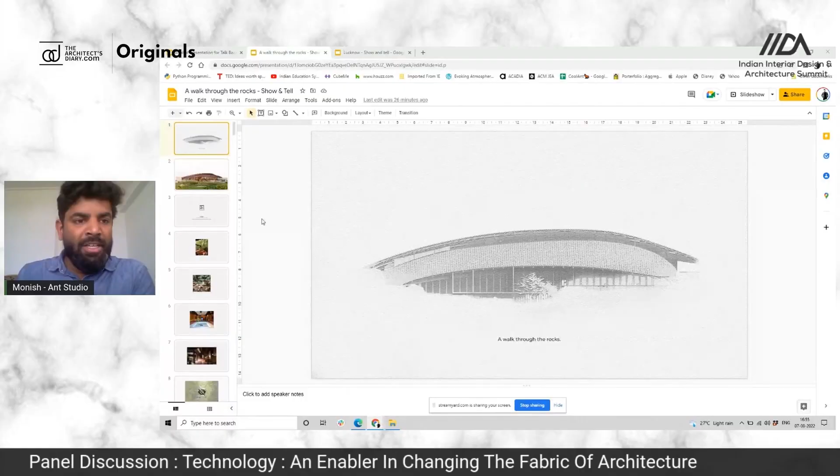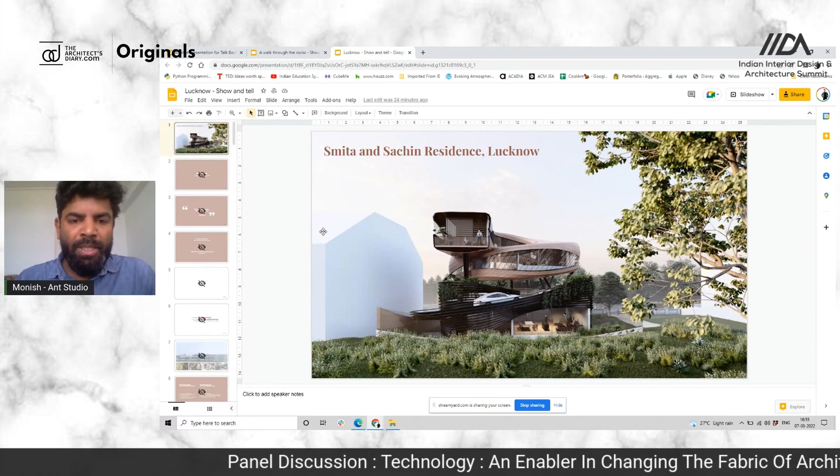So today I'll be talking about two projects. I think the brief in here is about nostalgia. The client wanted something absolutely stunning and modern, but at the same time very nostalgic in approach. The other one is the extreme opposite. Both are presented in an Indian context, but the other one is futuristic, where the client's brief was based on his aero manufacturing background, and he wanted a building to represent what he does, with access to all these advanced tools at his disposal, so he wanted something very futuristic.

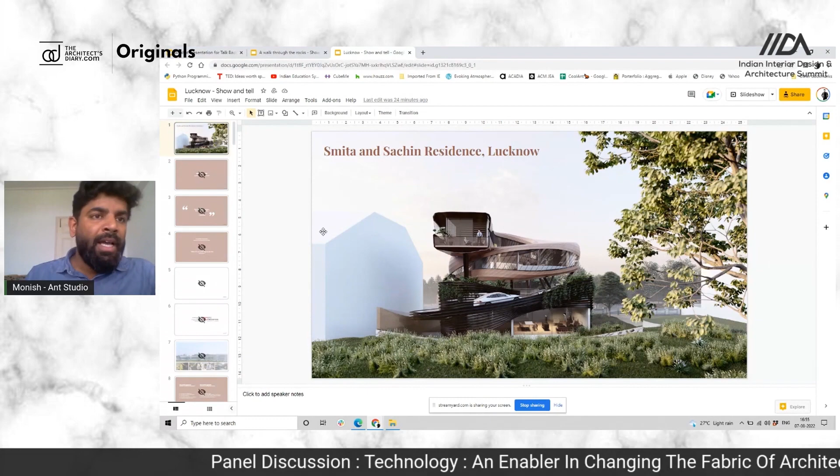So, yes, is my slide visible? All right, I'm assuming yes.

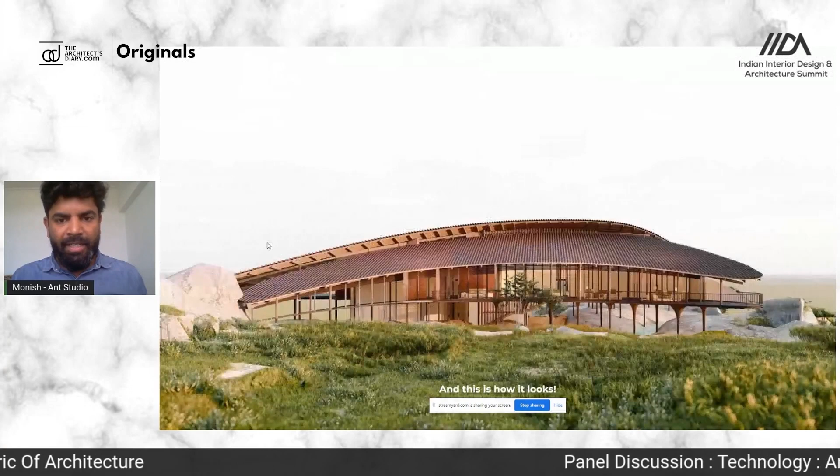So nostalgia, like I said, is what we were trying to solve with the first project. When we represented these images to the client, he said he wanted his building to be nostalgic. This is what really comes to mind when we talk about Indian context — traditional courtyard spaces with beautiful terracotta roofs, verandas and wood, especially if you look at the material, and all the natural materials you find in Indian buildings and spaces. So this is what we wanted when we put all of these together. The whole idea is that the building should represent this, so he can go back in time and relive the moments. One of the most interesting things he mentioned is that he wanted his grandchildren to learn about the past — that was something truly wonderful to hear from the client.

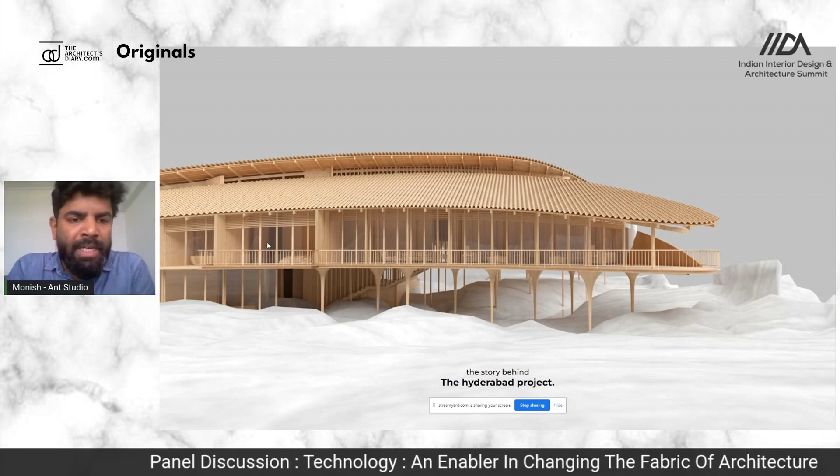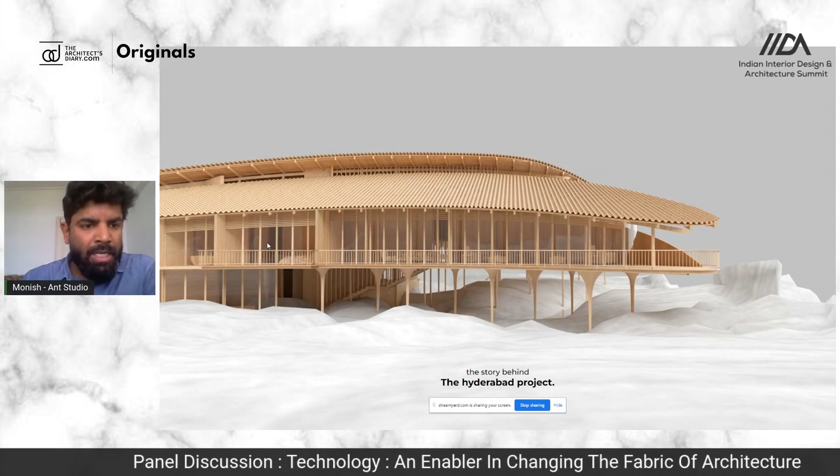So we came up with this form that is absolutely fluid and parametric, which would have been very time-consuming without the help of technology. But if you notice below, there's this undulating rock at the bottom. So when we speak about technology here, I want to talk about how it's not just about the building and the form, but also about understanding the ecology of the material and the site, and how technology can help us learn more about the surrounding environment and landscape.

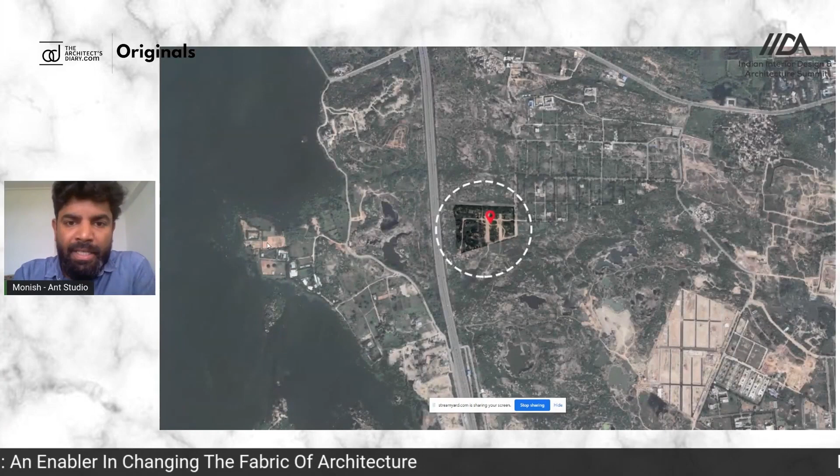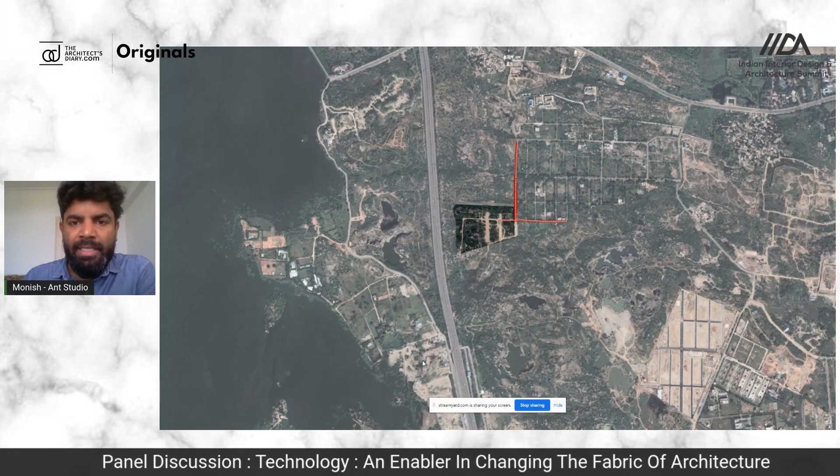So the site location is here in Hyderabad. If you notice, there's a beautiful site on the left-hand side with a lake. This is a main road providing access. I won't delve too much into the site, but these are some proposed projects at different plots, with a five-star hotel coming right below this.

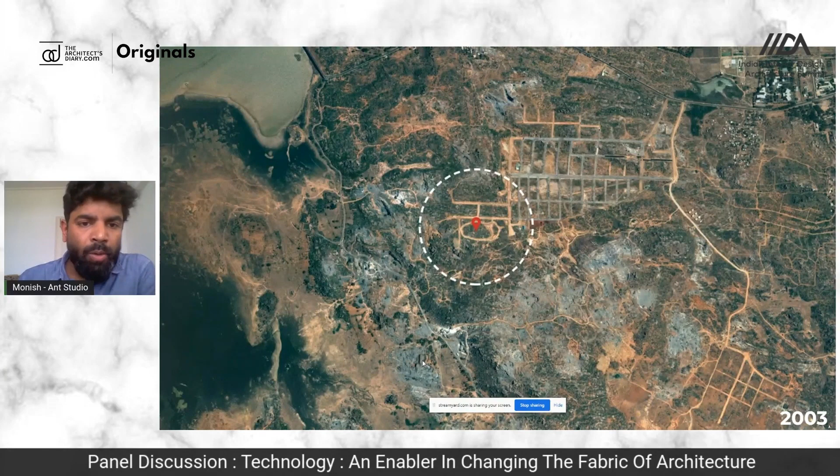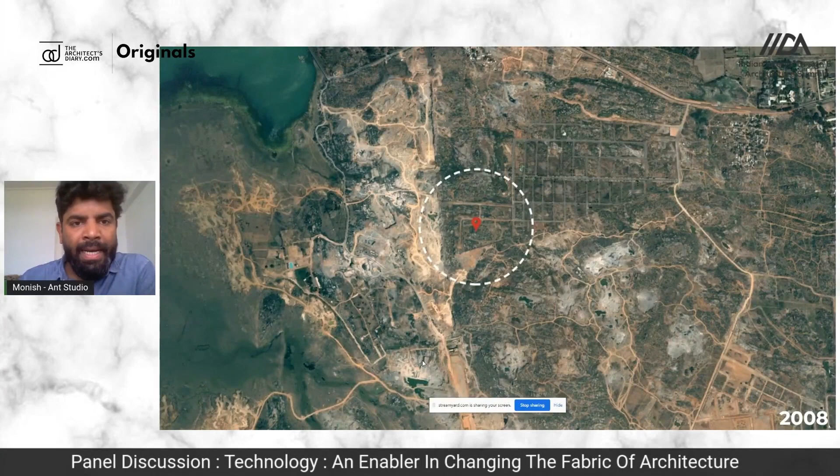This is the site, but it wasn't always like this. When we looked at how the site evolved over time, the lake was actually much further back — the lake line was way beyond where it is now. This is approximately 20 years back, around 2003, showing what the site looked like. Then they started building this road and access to connect the highway from the airport to Gachibowli, and you can see the change in the landscape.

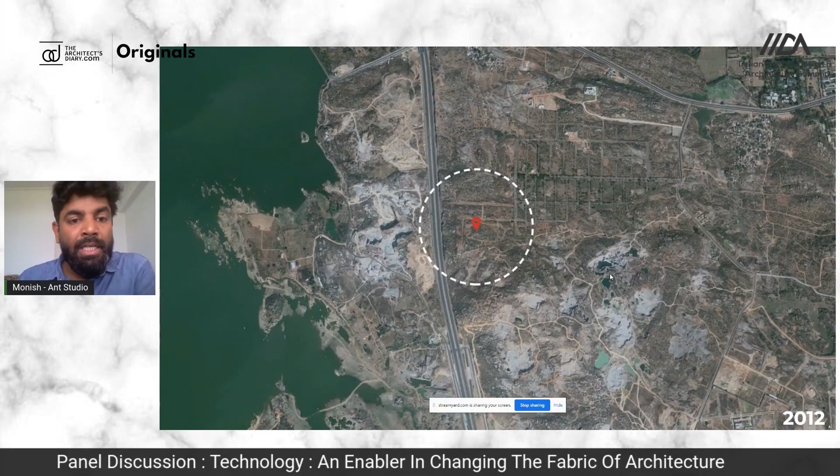Surprisingly, the lake started growing — you can start identifying these beautiful patches of lake and water forming, which is a very positive sign for the site. This is what it looked like just 2 years back — you can see a lot of green, and the lake footprint has actually increased.

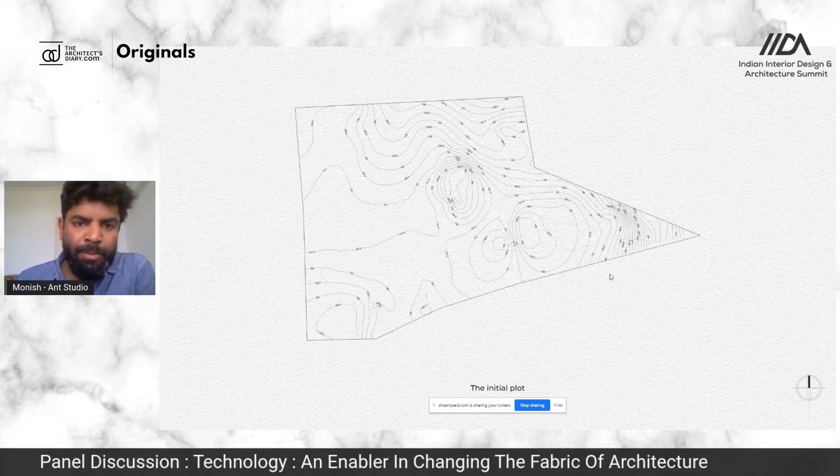So this is the rocky site, and one amazing thing about it is that when you stand on the edge, you don't see the highway — it disappears. I'll show you the footprint.

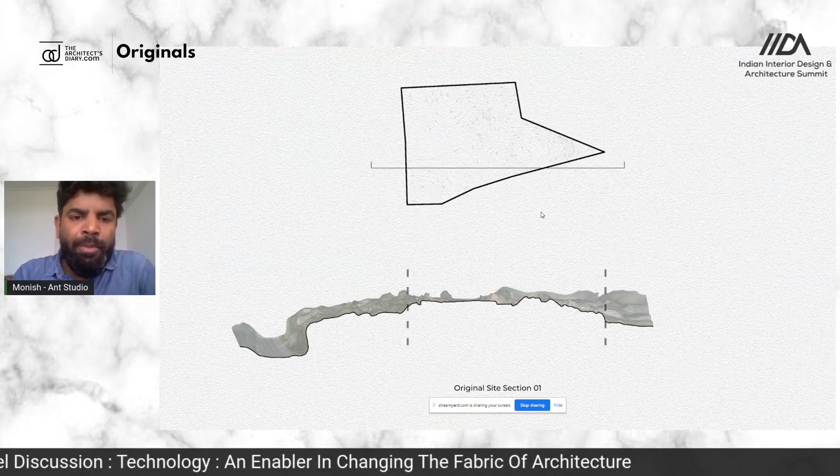So when we started, even before we made a sketch or any design on paper, right after my first visit to the site, I told the client that I think there is so much more than meets the eye. I requested the client to scoop out the complete land and unearth these rocks so that we can know what is below.

So the whole idea is rather than going upwards in the building, what if we first understand what is below? We got the site entirely cleaned up, exposing the rocks that are out there, so I could see if we can use these rocks as part of the landscape inside the building. We documented the rocks using drones.

And we have these little boulders that are actually scooped out to make the road. So the whole idea is also how we can use this material for the construction eventually.

Yeah, so this is what - I think I'll go forward. Like I said, this is where the site is sitting with these tall boulders. I'll just jump into the design.

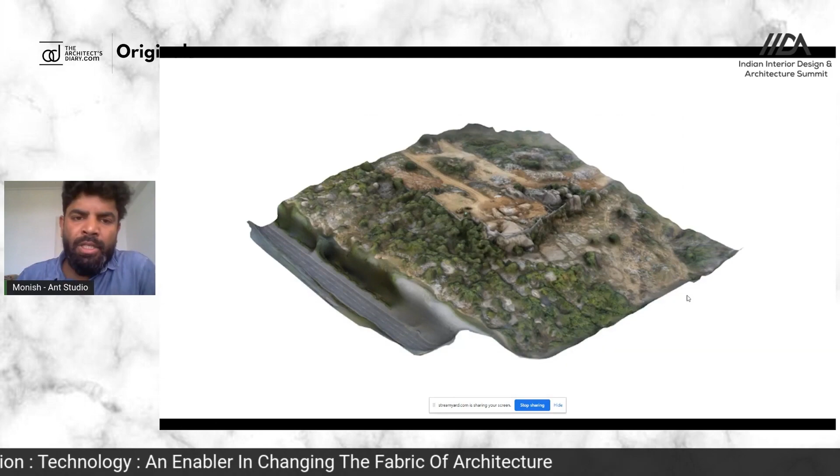When we started, I think this is where things got really interesting, because for such a spectacular site, what was really important for us is to understand it. So for us to actually make justice to the rocks, we did a 3D scanning for the first time - photogrammetry to take what is physical into a digital medium, so we can carefully carve out around the rock without tampering with the ecology.

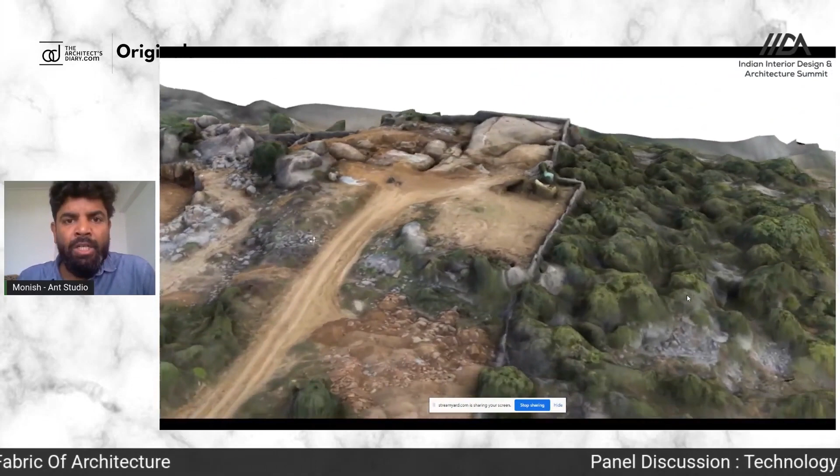So the whole idea is that, even before we started with the design process, we started with scanning it so that we can get the precise coordinates of each and every rock. Because when we presented this idea to the client, we said let's not do anything to the rocks at all and try to protect them as much as we can.

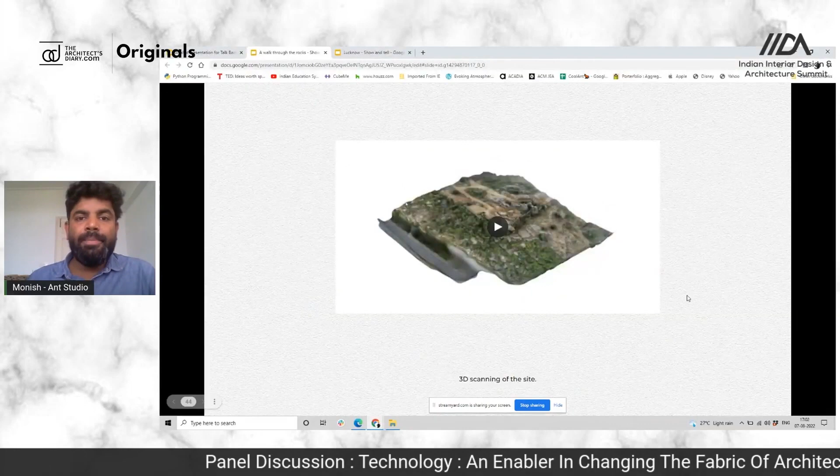Unfortunately, if you guys are familiar with the landscape of Hyderabad, this is a very common sight - everywhere what is happening is people either cut the rocks or actually build on top of it without really giving importance to the rocks that are below.

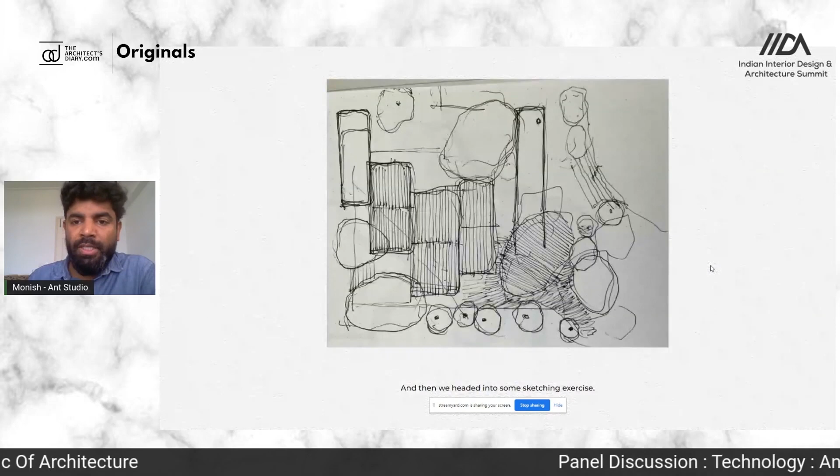So these are some of the initial explorations to build around the rocks, and finally we landed on this, where we said okay, there are these two beautiful rocks on the site, and what if we design a building like a split in between? And then this is what we came up with.

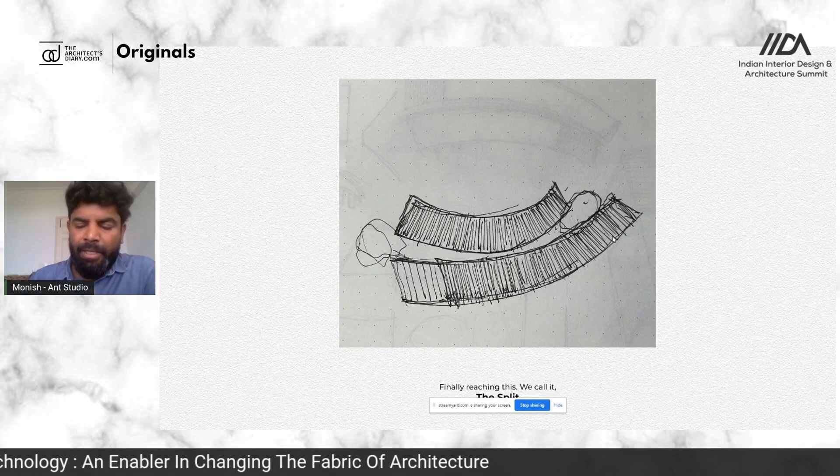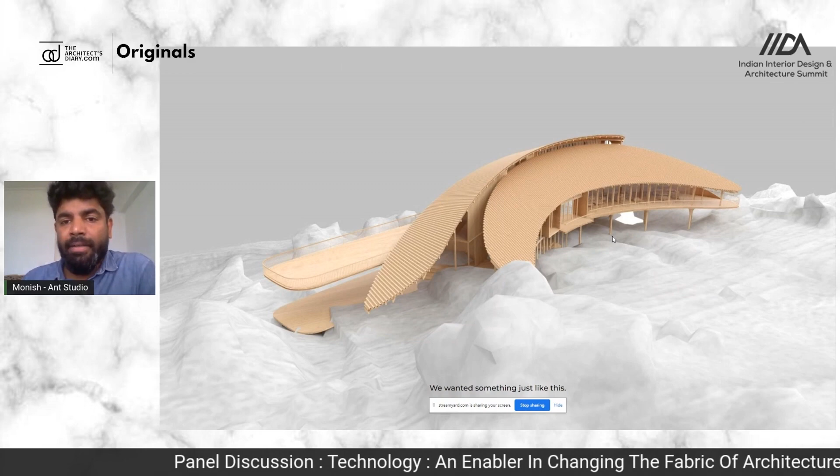Like I said right at the beginning of the presentation, the whole idea is what the client really wanted - a traditional building, when it comes to the material and the feel, the look and feel of it, and at the same time to have something that is really contemporary in approach.

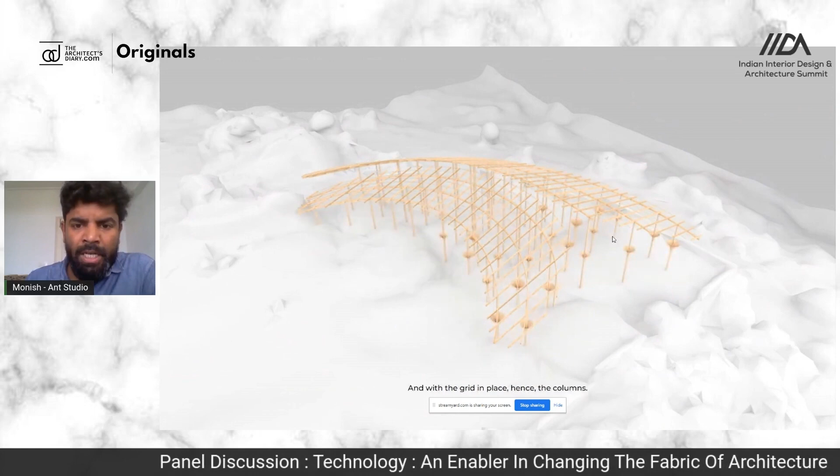So taking clues from all the traditional Indian architecture and the materials, with the purlins and the rafters, he wanted a lot of wood in the construction. So we went about designing these mushroom columns that will be visible from the landscape on the ground floor.

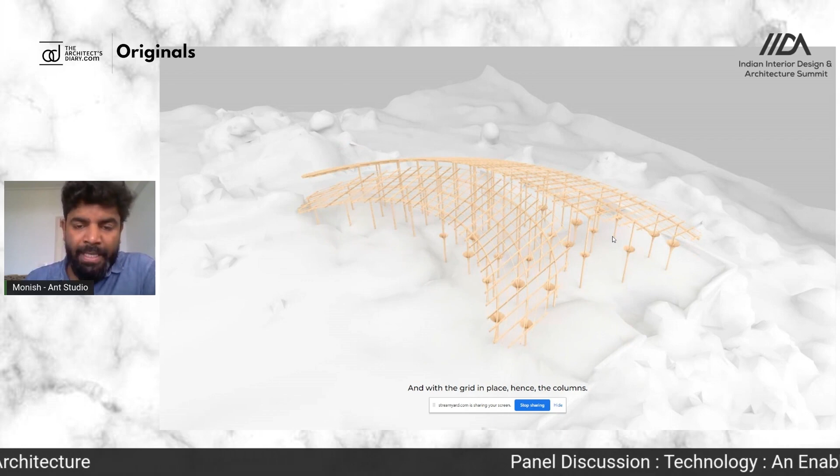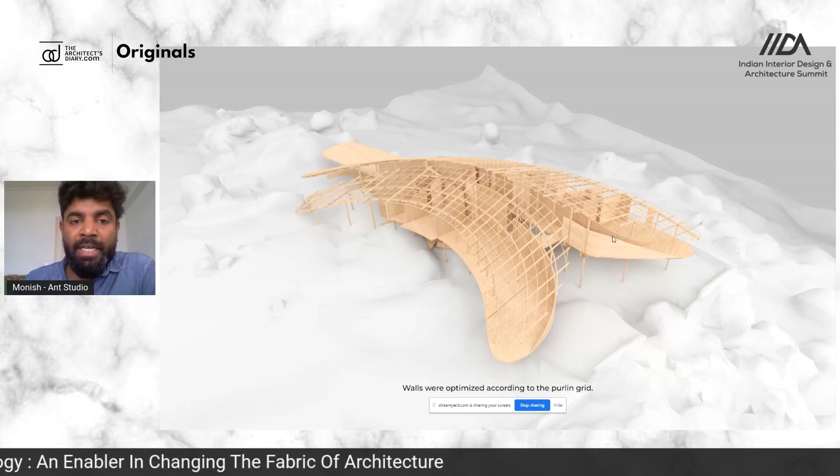Which we kind of made like an open rock landscape in the living room. It's like an open landscape on the ground floor, and we went about designing the building using slopes that can actually use this traditional kavelu, what we call the country tiles, for the construction.

And right on the top, there is a split in the building which can allow the light to come in and penetrate in between. And finally, we have this roof that sits on top of this.

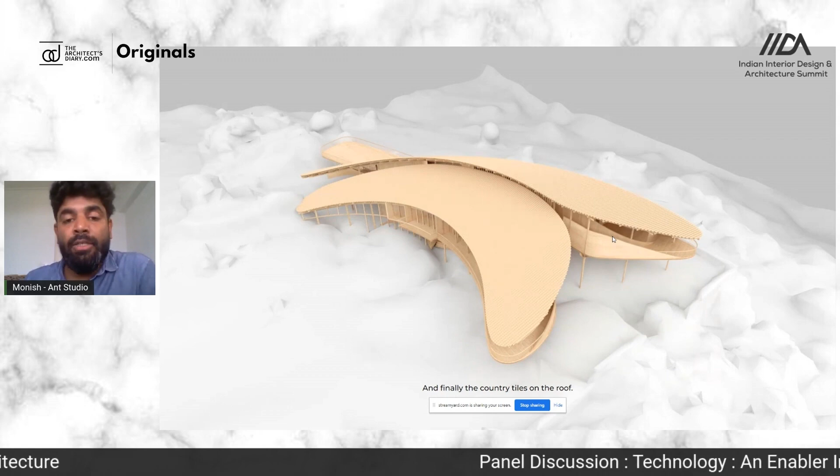So there's a lot of optimization that we have done to arrive here, so that the entire curvature of the roof can actually fit the traditional tiles that we use on top of this form. So that was really important for the feasibility of the project.

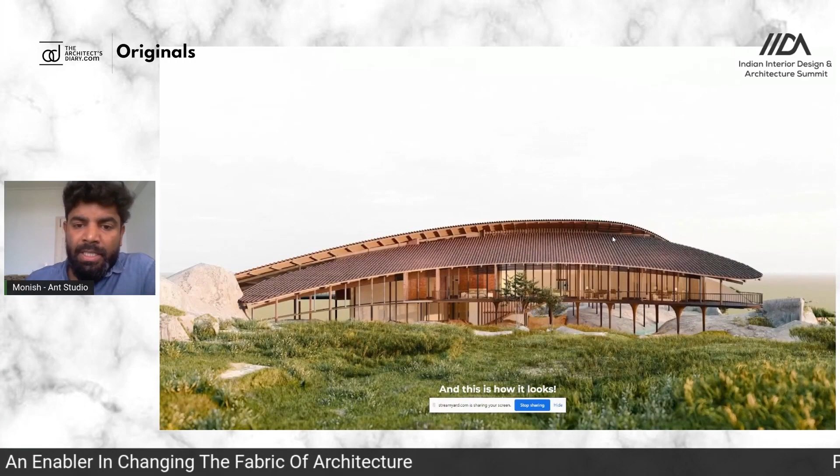So this is what you finally see, which is the whole building elevated. With this, I will not get too much into the planning part of it, but more into this.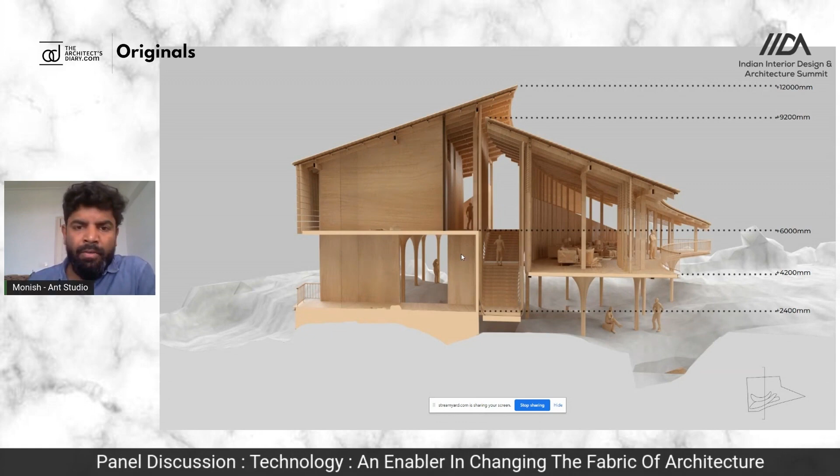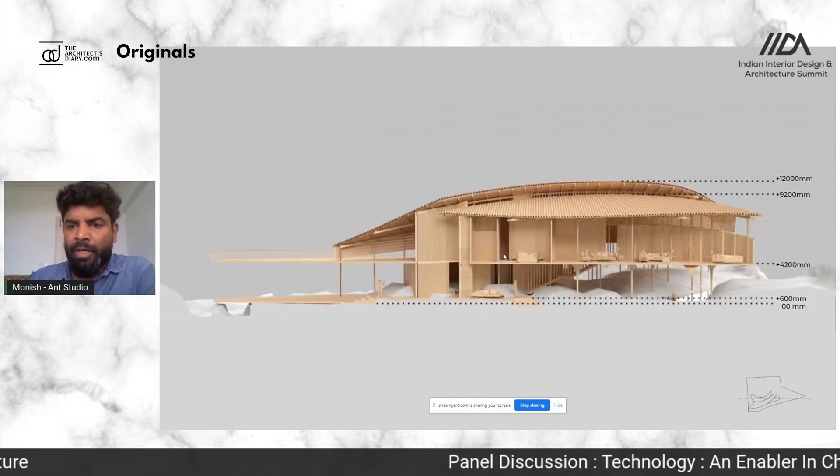So there is this split level with a staircase. We have divided the building at two different levels so that there is this narrative that follows at a mid level as we walk in, and also the building kind of opens up, so the entire living area in the front gets the view of the landscape.

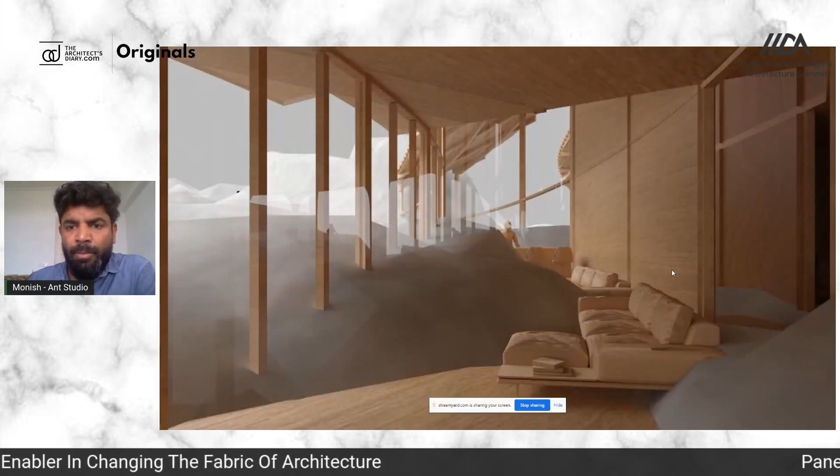This is the ground floor living room, bringing the rocks as is into the living spaces so that we don't have to cut them. These are some of the living spaces on the ground floor. Whatever recesses we created, we wanted to channelize and collect rainwater using this natural slope.

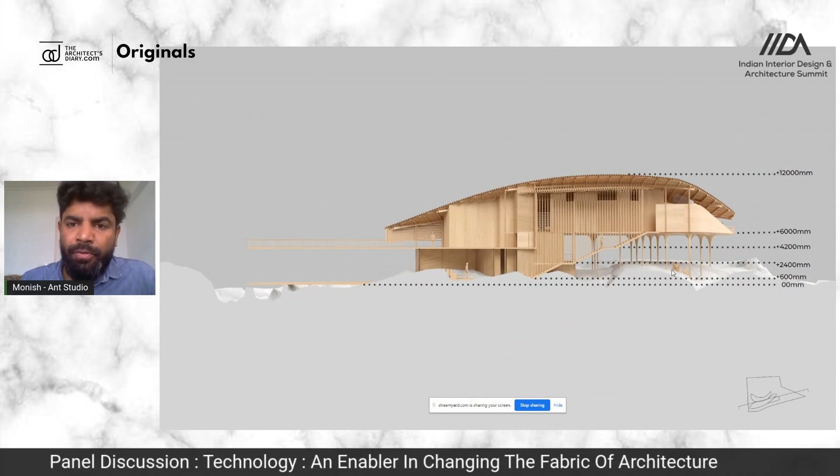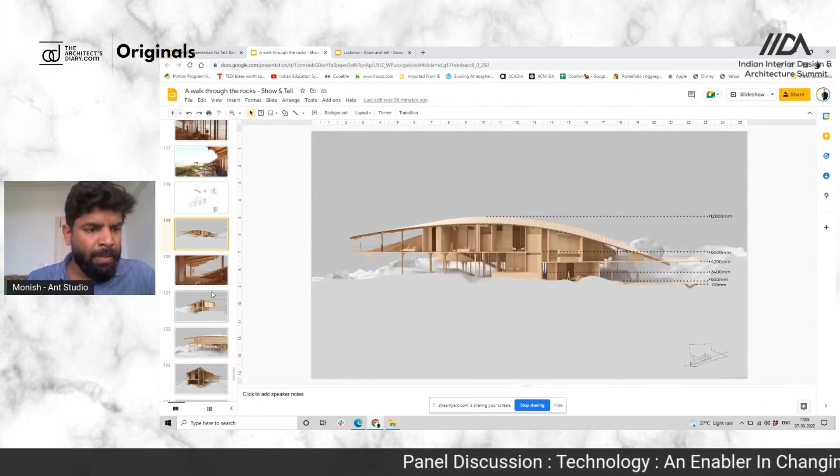So that we can create a natural water reservoir for irrigation on the landscape in the building. This was the first project, where we wanted to capture the nostalgia of traditional spaces, but at the same time use computational tools to arrive at that end. Finally, this is what the building looks like, sitting on the boulders, as if it's coming out, opening to the lake in the front.

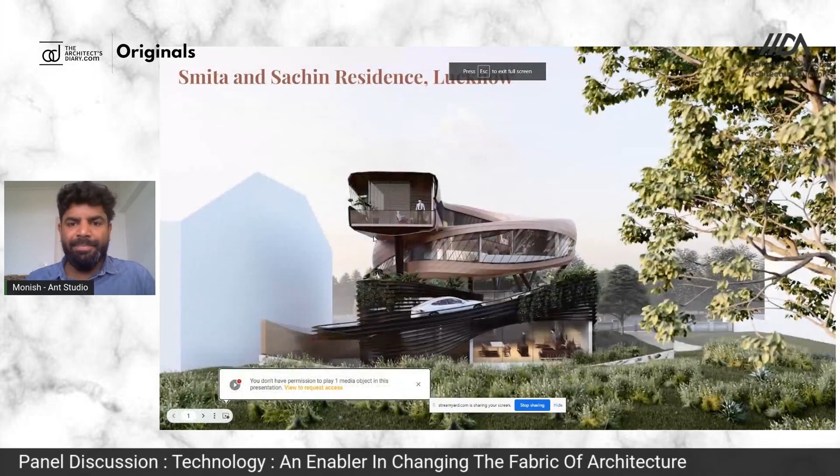If there's anything about the planning, I can take it in the questions. I'll quickly move to the second project, which is a roller coaster, both in form and also in the process so far. It was kind of a different kind of experience to present.

So in here, the site faces the golf course, and what you see is actually a view taken from the golf course, behind the project. The client's brief is that he wanted the parking or drop-off to be on the first floor, so you actually climb up like a ramp that goes in, and there is this landscape.

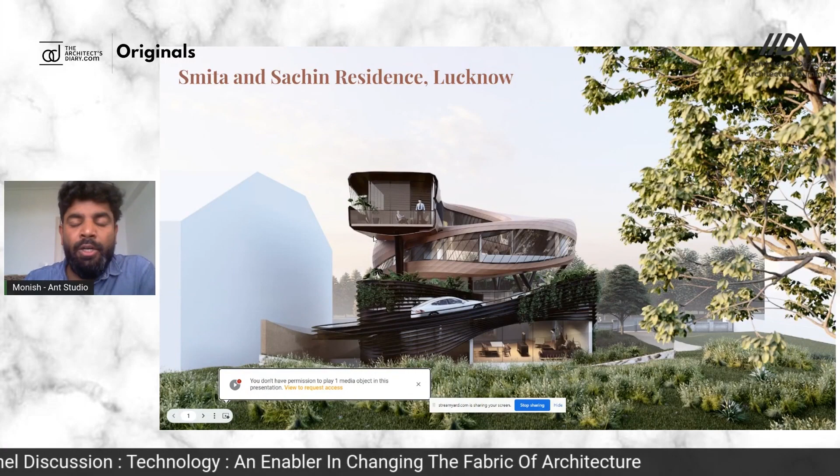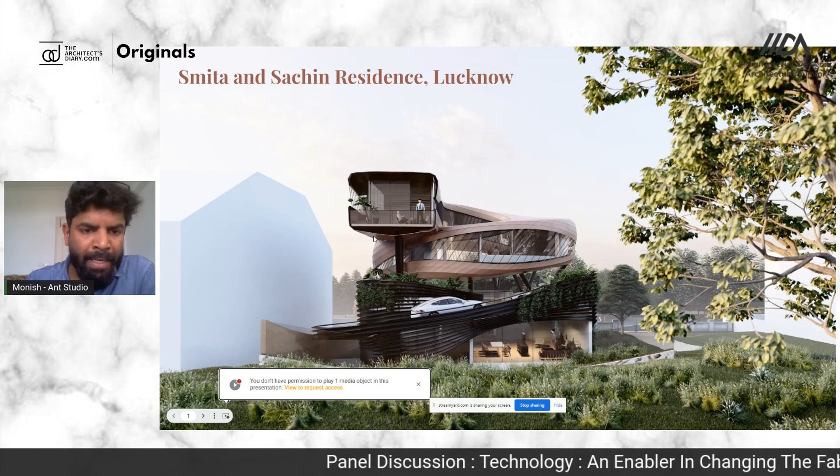So there is this form that is kind of free-flowing. One very interesting thing in this building is that all the spaces are actually fluidic, including the floor plates, not just the form. There's a lot of fluidity in the floors as well. Of course, there are flat areas for furniture, but a lot of circulation is carved out so one can freely move from one space to another, like walkable surfaces. I'll go more into that at a later stage.

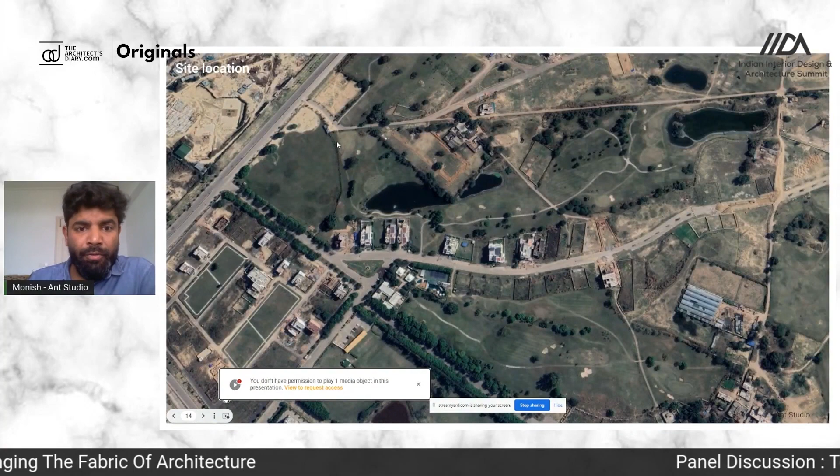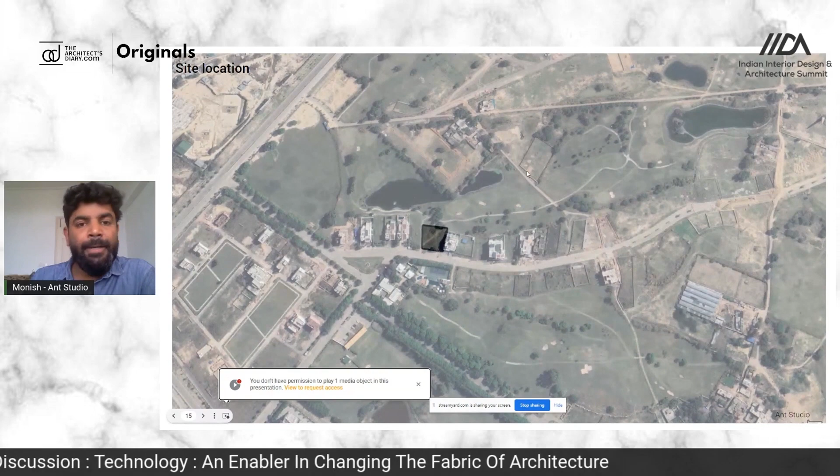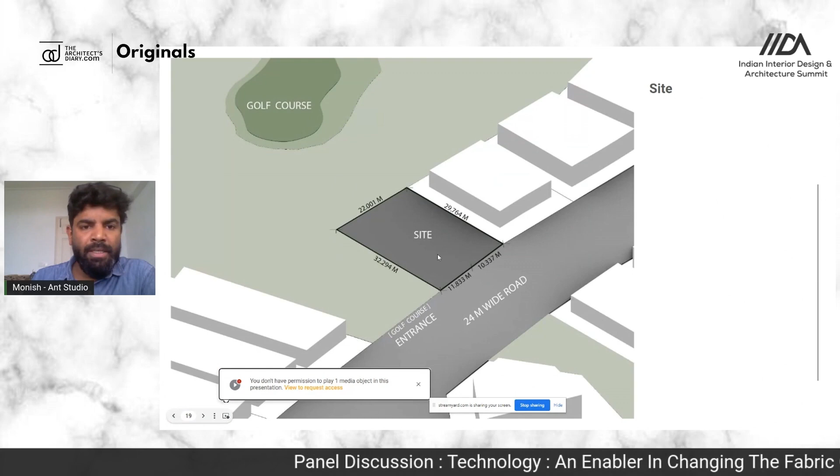This is the beautiful view one gets from where the project sits, and this is a three-side open site facing the golf course, with a water body and all that. The idea is how we can get the maximum experience from all the rooms, so the client can draw experience from multiple areas. So this is the site.

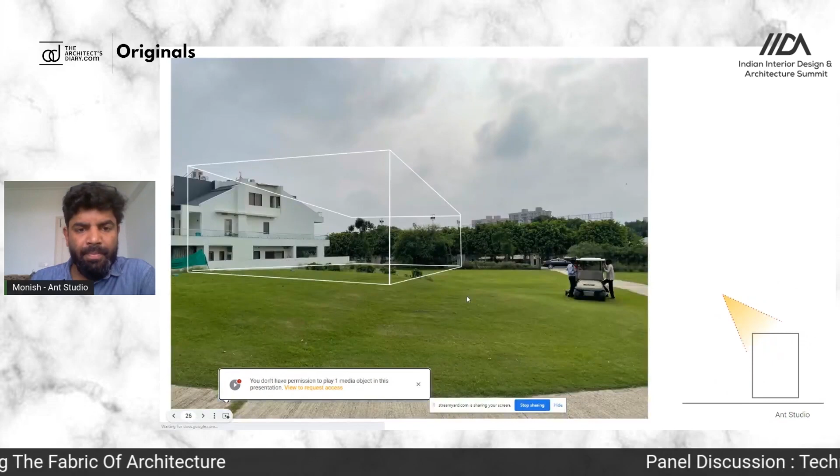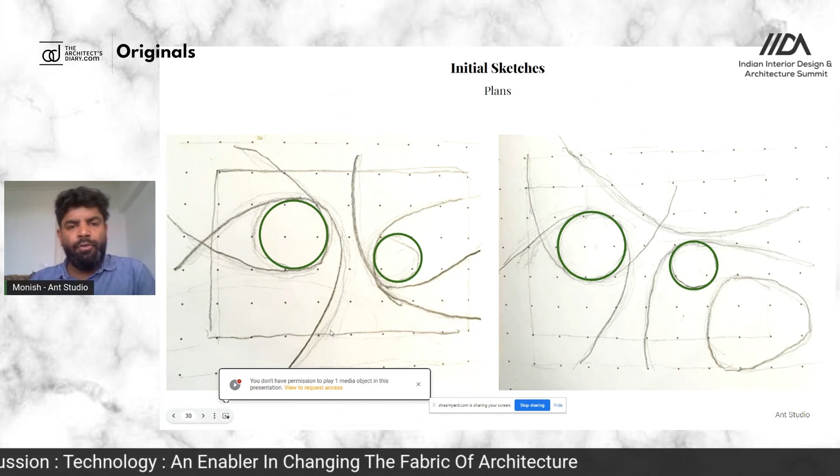I will not linger too much on the images. When we started the first design process, we wanted to draw spaces where each and every space can turn in a fluidic manner, and how we can connect them from one space to another. These were some of the initial explorations and sketches of how we can connect these spaces.

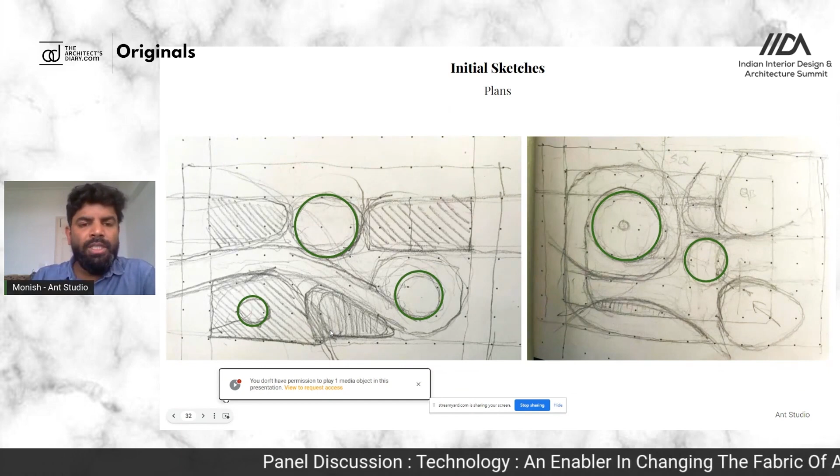What you see, these circles, are basically courtyards. We wanted these lingering courtyards in between, and wanted to connect them so that between spaces there are these beautiful open courts coming inside the building. And these are initial facade explorations of what we wanted the building to look like.

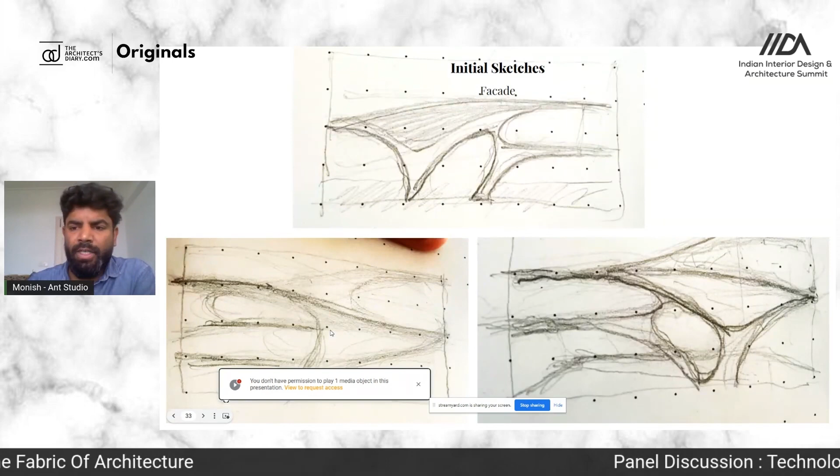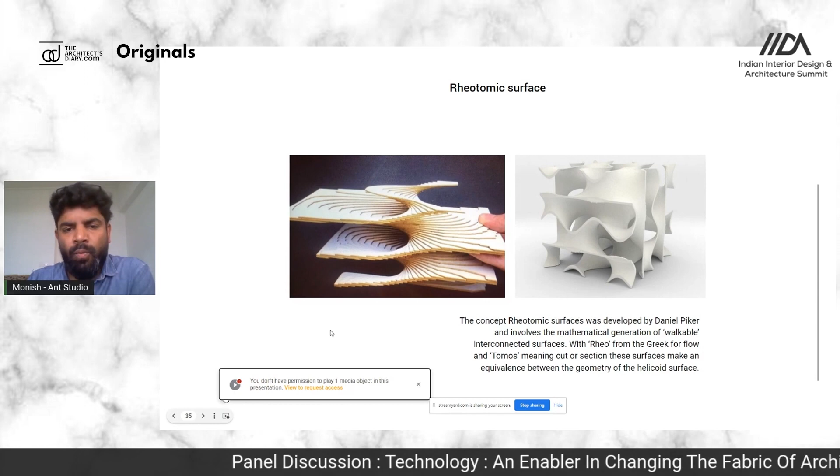We definitely explored a lot about the rheotomic surfaces, because we wanted the spaces to be as fluidic as possible, but finally we went about it without actually using the rheotomic surfaces, just the essence of it, in which the floor spaces can be walkable from one end to another.

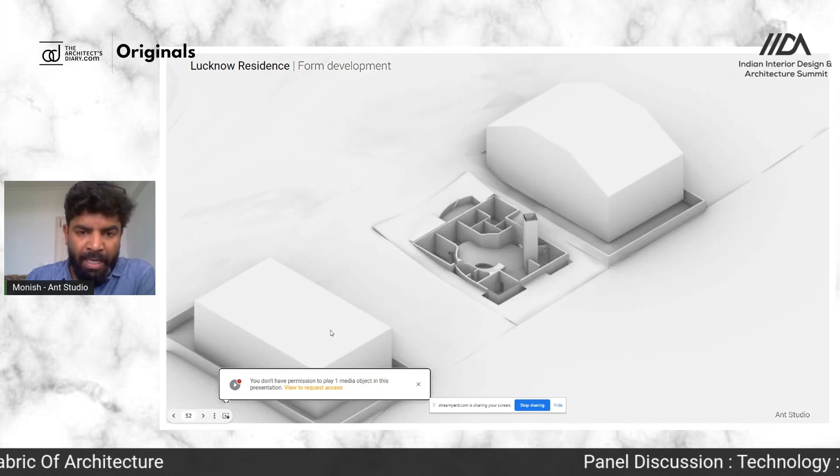So this is the final design. We have this anchor in the middle, which becomes like a home theater, and there's a ramp that runs on top to the lower basement. Then there's an entire central space, which is the entry when somebody enters the project, and you see a beautiful drape on the facade, as if you lifted these louvers, and the entry is formed inside that, like entering a curtain that lifted up, with these beautiful rocks in this corner.

Another challenge we found on the site is that this site is lower than the golf course site.

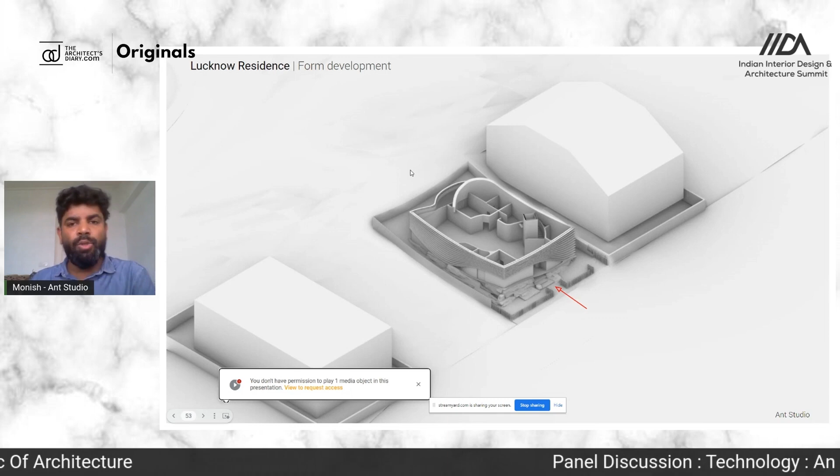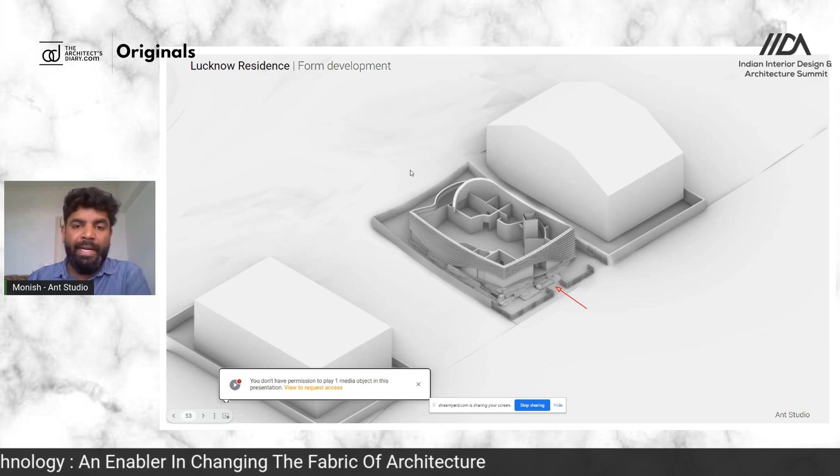The whole building follows this curvature so that as a person walks into the space, he starts climbing the smooth ramp to arrive at the living spaces. As you can see, there's a ramp from behind that climbs to the first floor to reach the parking and drop off.

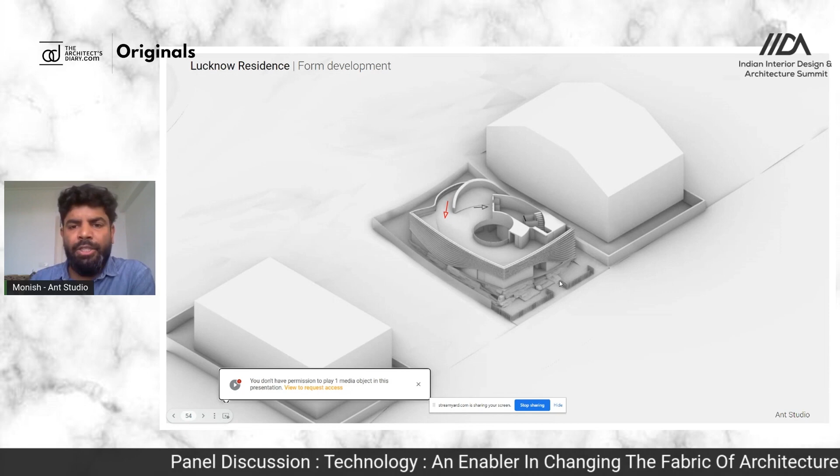There are actually two entries: a pedestrian entry on the ground floor, but the main entry with the parking and everything is on the first floor. And we have column supports for the structure.

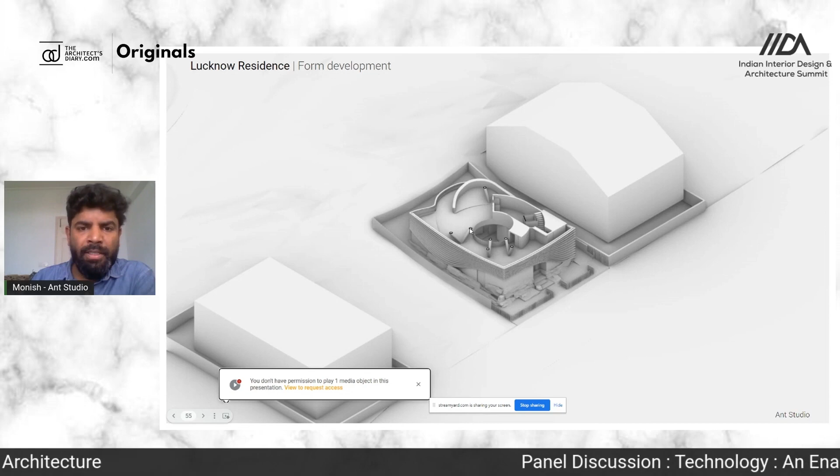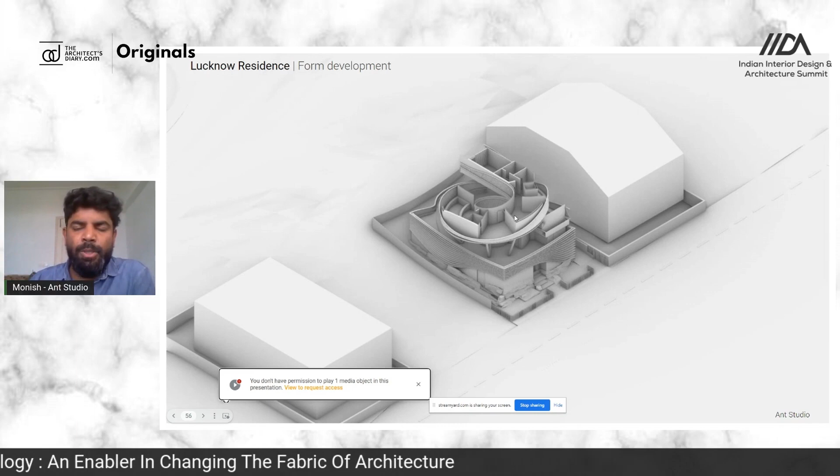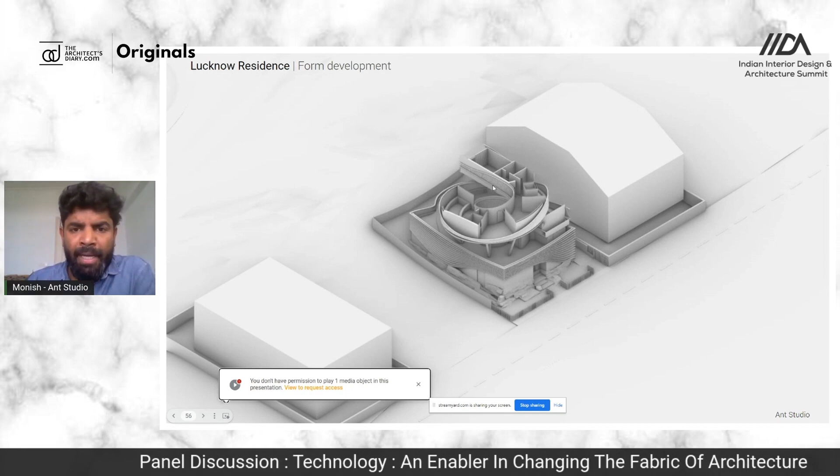This is where the whole floor space gets really interesting, because the floor also starts to become curvy. It was quite a challenge to make sure the functions are accessible, with the pool and different spaces stepping up, while not compromising on the functionality of the spaces.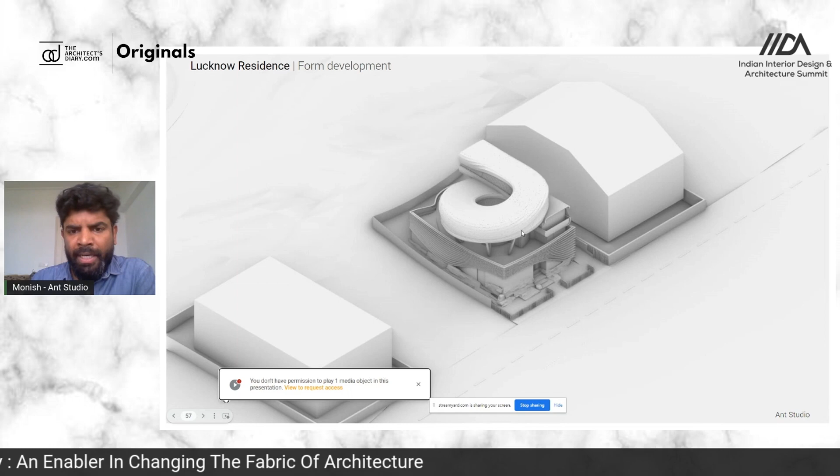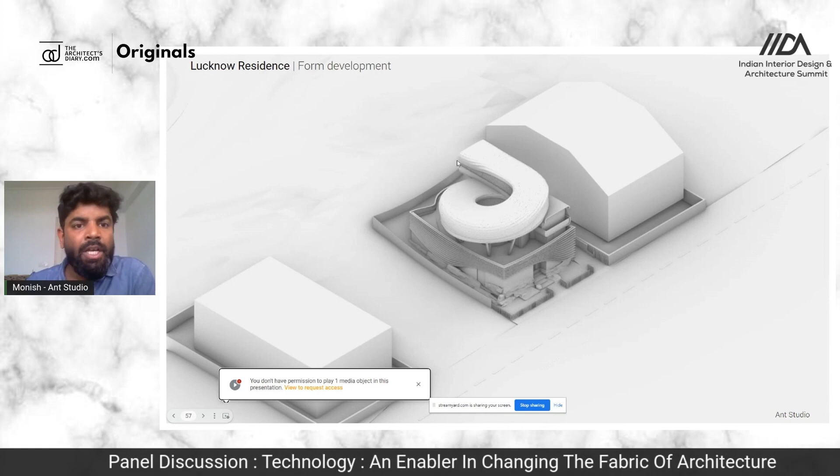So this is finally what we have. This area in the middle is the curvy part, but when you enter, this is what keeps moving and shuffling between the spaces. There's also a courtyard that runs all the way from the top to the basement, to the second basement.

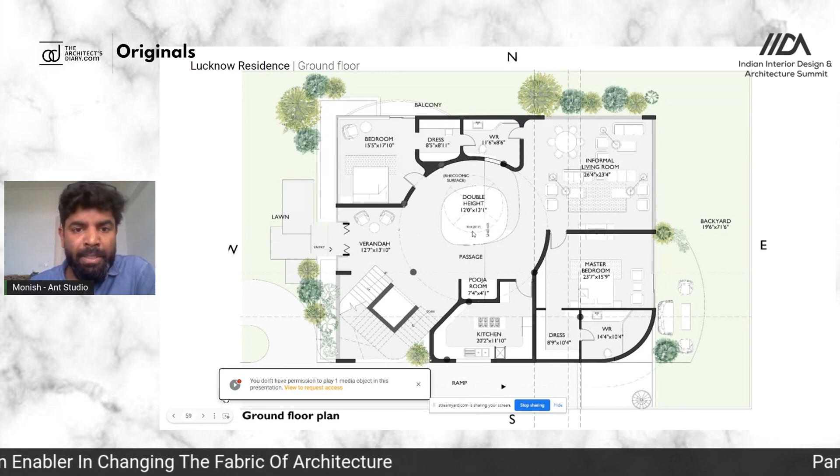This cutout draws light all the way from the spiraling form on top down to the second basement, which has a home theater, and the informal area opens towards the golf course and so on.

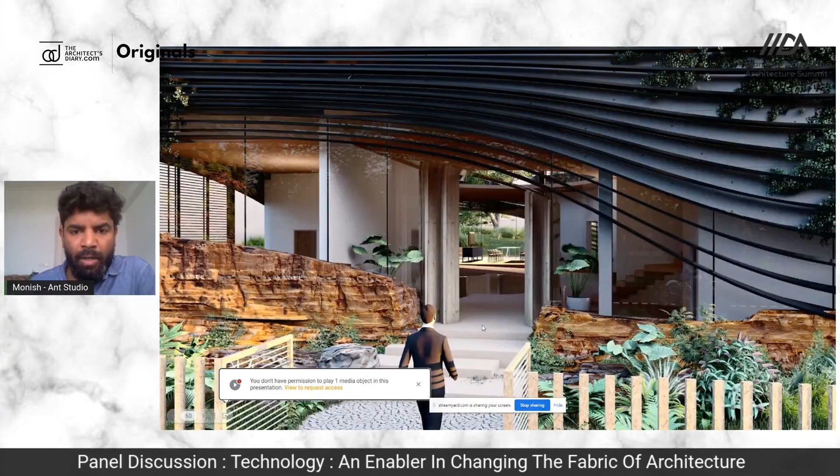So this is how the entrance is. As you can see, right when you enter, the idea is that someone can straight away get the view of the golf course on the backside. You can see that right here.

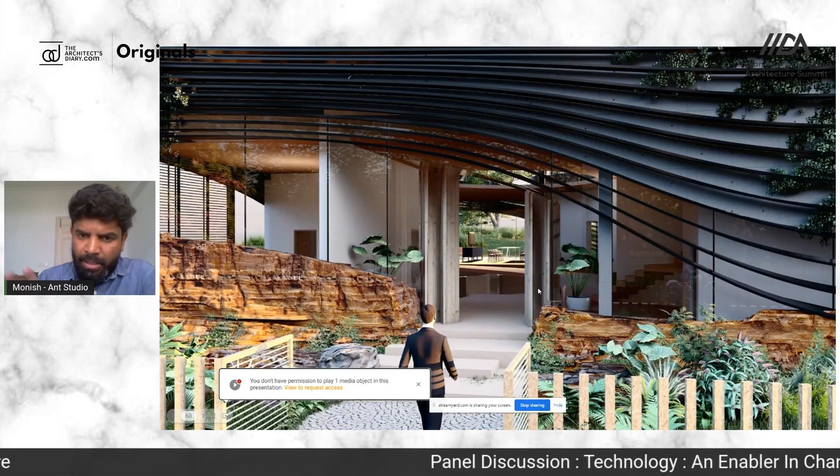When you enter, you see this form slowly climbing up, but the experience is that one can get the view all the way to the golf course.

There's a section through the building. You enter on the ground floor. There is the spiraling thing that goes down, and the skylight goes all the way to the home theater on the second basement.

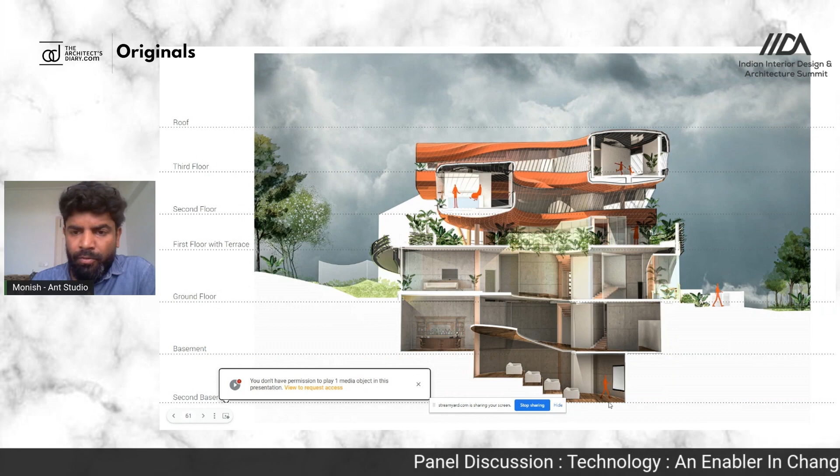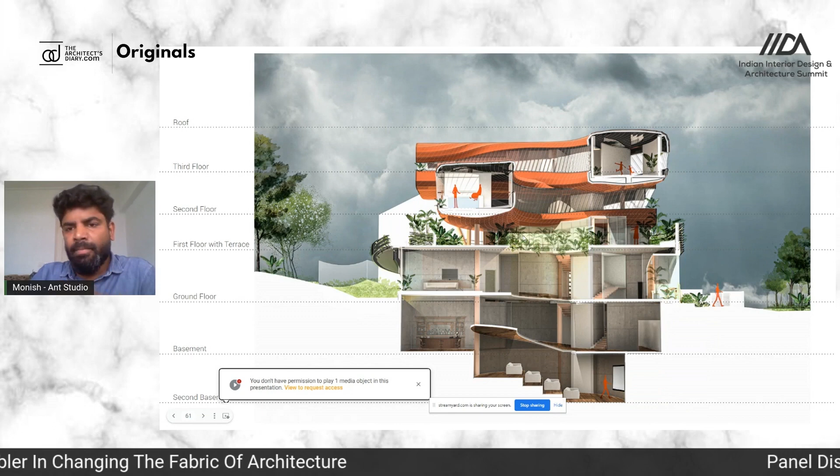There's a sandwich of landscape at the first floor level that connects both these blocks. The whole first floor is designed as a common space for these areas to connect, and this is where the drop-off is happening on the ground floor.

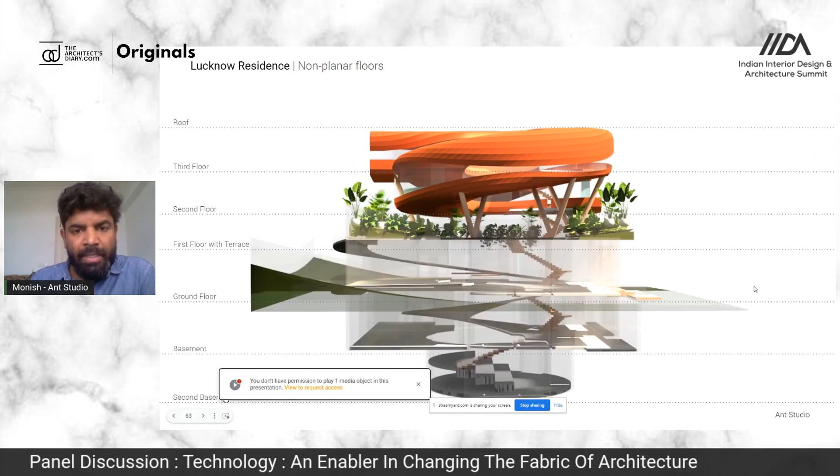Some images from the first floor area.

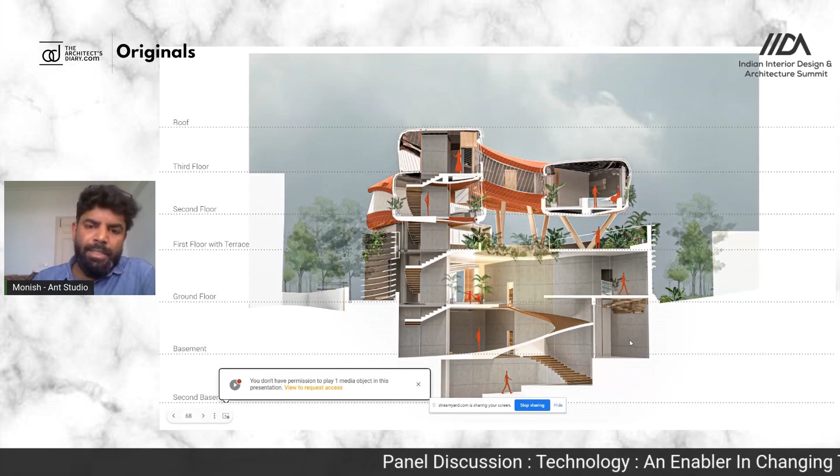Another isometric that shows how the spiraling thing connects everything, without really compromising on the functionalities, and how one can see the spaces evolving.

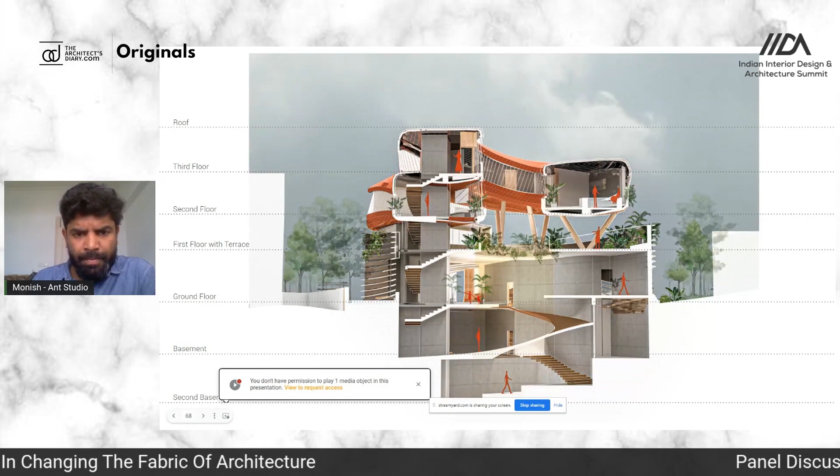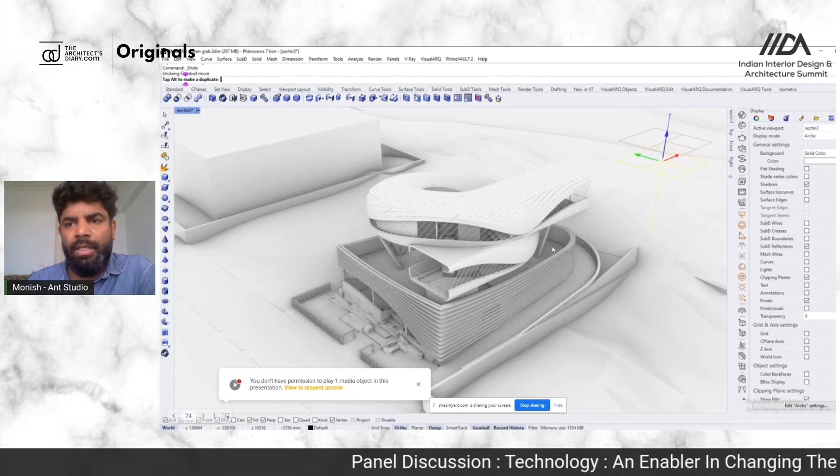I'd like to conclude by saying that since we're discussing what technology can do, especially in the Indian context where we're obsessed with context, we still get different challenges from different clients. Fortunately in this case, it allowed us a lot of experimentation with technology and how forms can be evolved using this approach.

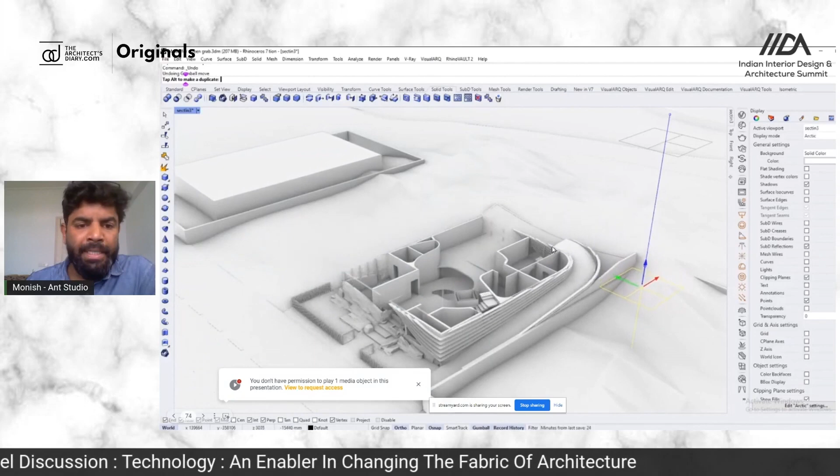Whereas the previous example I discussed is very much driven by traditional architecture relevant to India, technology can also help break that mold and push boundaries, so we can do something with traditional forms without trying to replicate what was already there, but in a more innovative manner.

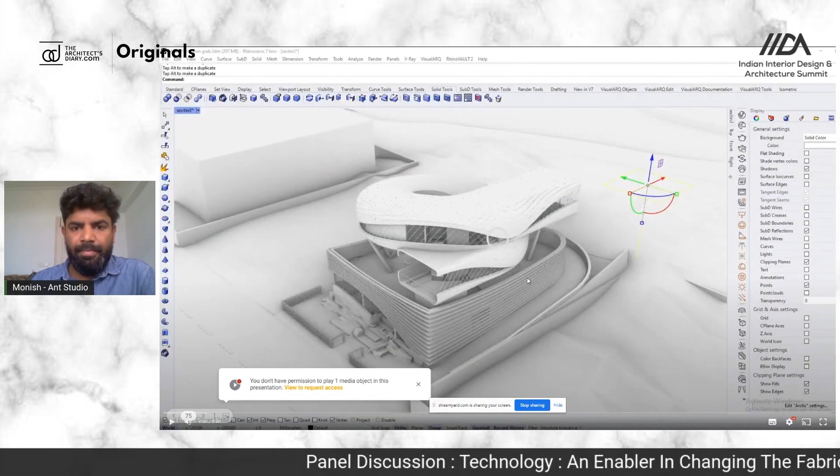Both the structures, as usual, are totally something you cannot expect an Indian residence to look like, but they absolutely look very interesting. I wish instead of being on this side of the screen, I was probably in the house or something. I think that would have been a much more interesting experience.